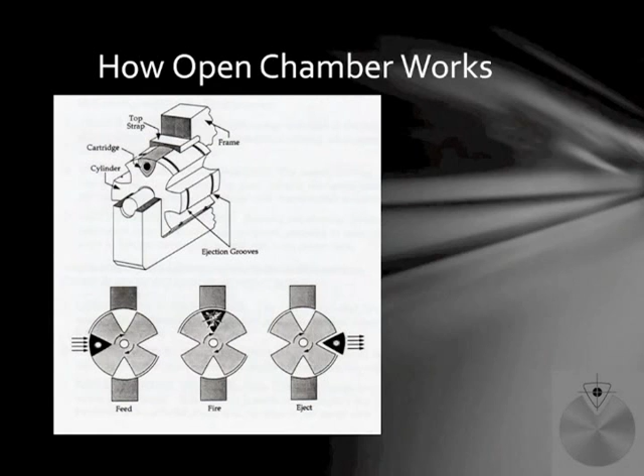What is the open chamber gun concept? Simply put, it is a non-circular cavity cut into the side of the cylinder of a gun. This arrangement allows ammunition to be fed, fired, and ejected with no need for insertion into a firing chamber. The firing chamber is formed by the top strap of the gun frame when the cylinder rotates into firing position. This design does away with the need for bolt action or any mechanism that provides insertion and extraction into the firing chamber. It's a simple concept, one that has numerous advantages over conventional gun designs.

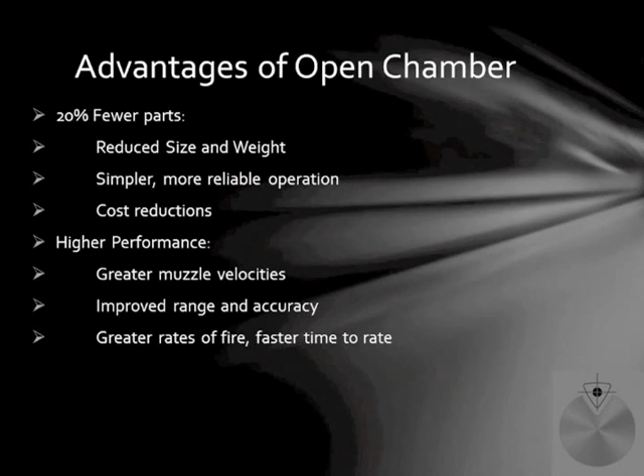Among the proven advantages of open chamber are reductions in size and weight, improved reliability, cost reductions, and higher performance. All of these are important, but there is one advantage that is truly breakthrough. It is the impressive flexibility that the design allows. This flexibility gives us the opportunity to provide solutions where conventional guns cannot.

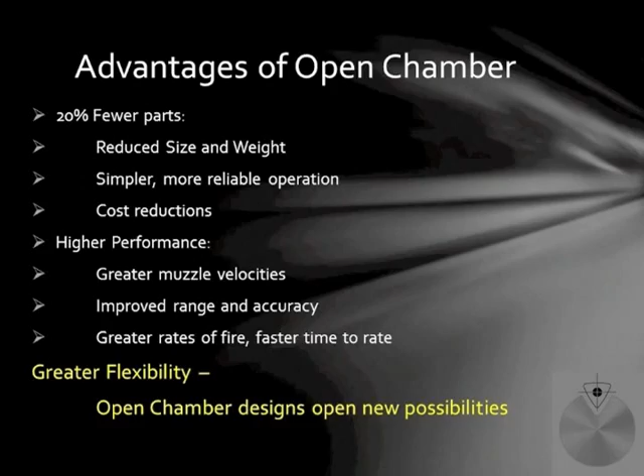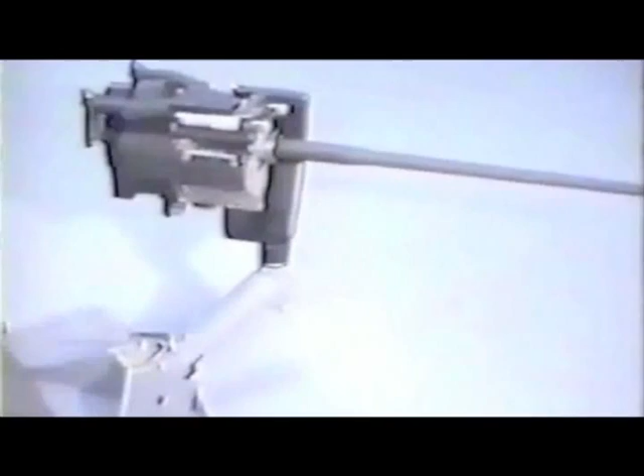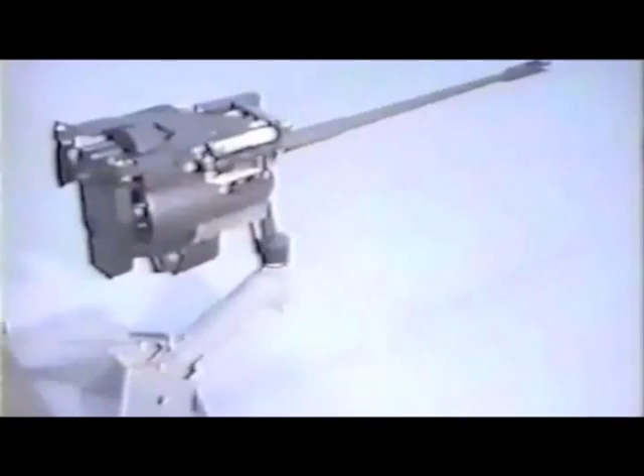The last company to develop open chamber technology was Tround International. The company was undercapitalized from inception and did not survive the defense industry cuts that marked the end of the Cold War. It did, however, successfully build prototypes that proved the significant advantages of the open chamber concept. Among other innovations, Tround built this .50 caliber machine gun that will serve as a basis for our initial platform.

We have formed Open Chamber Systems, LLC because of an important emerging market, one with technical challenges not well served by current options, one where the advantages of open chamber allow us to create a solution that does not yet exist. This market is the less lethal weapons market.

Increasing sensitivity to the unnecessary loss of life in peacekeeping, security, and law enforcement operations is a worldwide trend. This is true even as the challenges of civil unrest, regional armed conflict, the threat of piracy, and the need to protect valuable assets in dangerous locales persist and grow.

The United States Department of Defense has made it a priority to develop less lethal weapons options to help our forces effectively operate with reductions in the loss of life. They are not satisfied with the options they currently have in their arsenals.

Security agents, law enforcement officers, and soldiers currently have two options when they must suppress aggressors. Either use lethal force against these threats or accept increased risk to themselves or their objectives in order to save lives. There is no current weapon system that delivers the power and accuracy of conventional firearms with reductions in the chances of serious injury or death offered by less lethal weapons.

The reason for this is the inverse relationship between a weapon's effectiveness, in other words, the chances bad actors will be stopped, versus the risk of significant injury or death. This is the major challenge any less lethal weapon system must surmount.

New technologies, such as energy weapons that do away with projectiles, are under development. These show potential but also face major hurdles. They are logistically unwieldy, expensive, and may be too easily defended against. Nevertheless, research and development continues. Experts believe, however, that it will be more than a decade before energy weapons are deployed at scale.

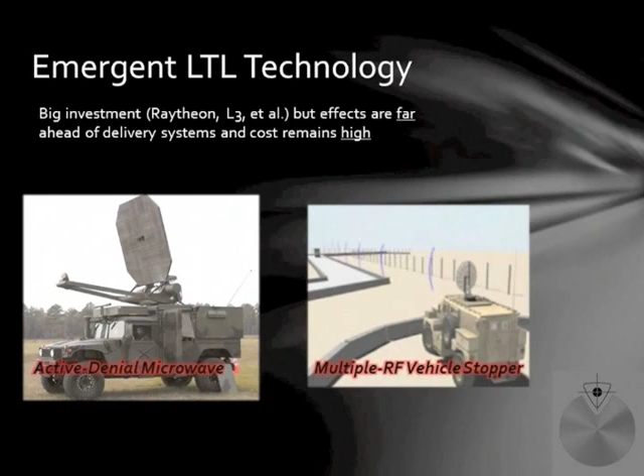The less lethal weapons market is substantial and growing rapidly. The Homeland Security Research Corporation estimates this market to reach $2.4 billion in 2012 and continue to grow at 17% per year.

There is a big window of opportunity for lower-cost, projectile-based solutions, especially for ones that solve the inherent less lethal challenge. Two properties of the open chamber design allow us to do that. The construction and geometry of open chamber ammunition is why we can offer capabilities that others cannot.

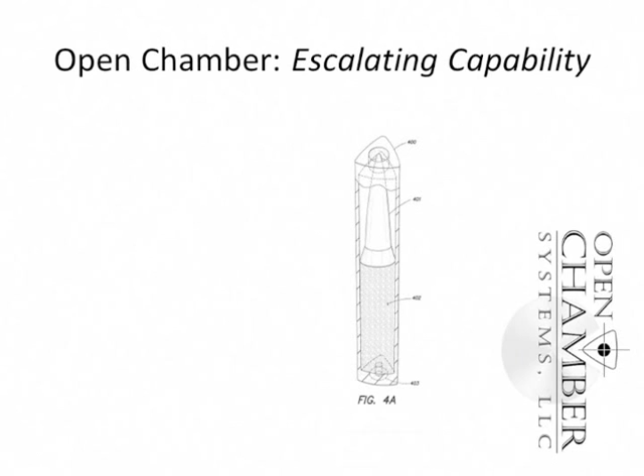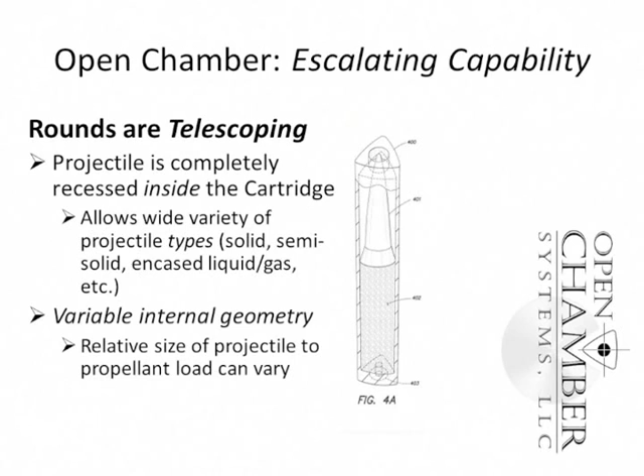The cartridges are called Trounds, for triangular rounds. Trounds are made of plastic and are telescoping, meaning that projectiles are completely encased and isolated from the external environment. The design also allows for a variable internal geometry, meaning that the relative sizes of projectiles and propellant loads can differ and yet still be fired from the same gun.

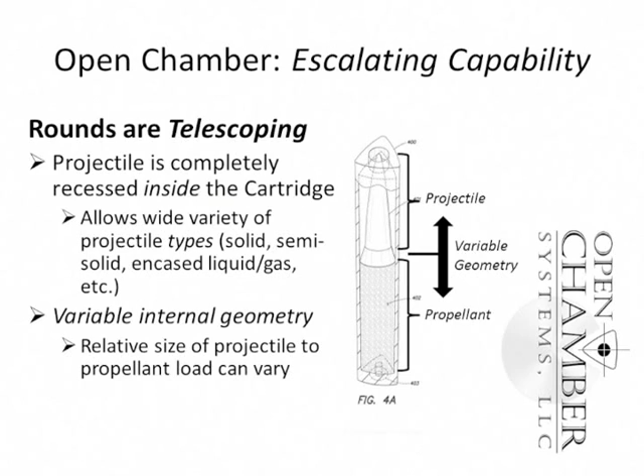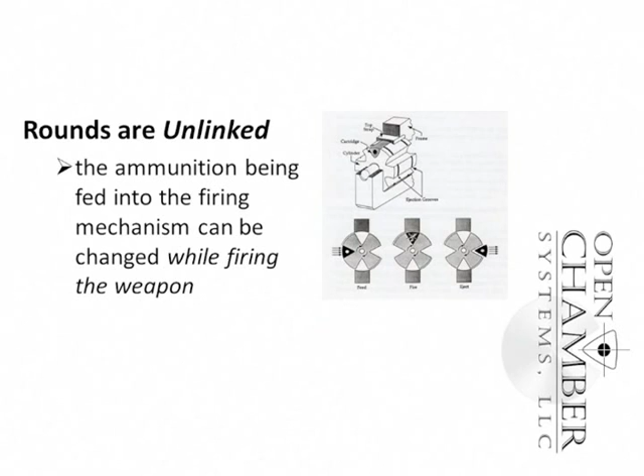The non-circular shape of Trounds allows them to be fed into the gun without the links that typically connect rounds and feed systems for conventional fully automatic weapons. This, along with the geometry of the open chamber mechanism itself, allows us to build a weapon that gives the operator the ability to select different types of rounds while firing the gun. Combined with the variety of possible projectile options, we can thereby deliver breakthrough capabilities for less lethal applications.

We have conceived a new weapon platform to fill the void between current less-than-lethal options and conventional guns. We call it the YellowJacket, and will offer users the flexible scalability they need to effectively control a space, disperse a violent mob, and defeat armed aggressors, even if those aggressors have guns.

The YellowJacket will be capable of firing fully automatic at rates that may exceed 2,000 rounds per minute. It will also have the ability to select a variety of ammunition types and propellant loads. These features will allow the YellowJacket to maintain an optimal balance between stopping power and accuracy versus the chances of significantly injuring or killing people, and do so in dynamic tactical conditions.

The capabilities of the YellowJacket system will be useful to local, state, and federal law enforcement, private security, anti-piracy, all branches of the military, and their counterparts worldwide. The flexibility of the YellowJacket platform will allow us to optimize the configurations and ammunition options according to the particular needs of these applications.

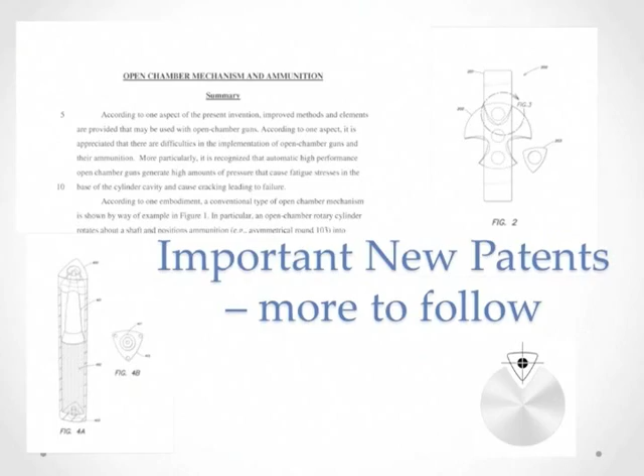The original patents for open chamber have expired. We have filed several new improvement patents that cover crucial elements for both the gun and the ammunition. Among the provisions is the use of open chamber in non-lethal weapons applications. These, and knowledge of open chamber unique to our team, give our company effective control of the technology.

The team currently consists of me, my brother Scott, my father Steve, and minority partner Dr. Andrew Hill, who is a professor at the U.S. Army War College. Our plan is to add high-performing engineers and technicians to our core team, partner with firms who are established in the marketplace, and successfully bring open chamber products to the market.

The majority of the company's revenue will be generated through the sales of ammunition. Our technical team will constantly innovate, especially regarding the ammunition. We plan to ramp up capacity and produce the ammunition ourselves, possibly using 3D printing because of the plastic case Trounds. For the production of the gun system itself, our plan is to license established manufacturers.

Our sales projections assume that we will secure our first evaluation contract sometime in late 2016. For the initial two production years, we project primarily evaluation contracts. From there, we project modest but steadily growing system orders. By year ten, we anticipate sales of at least 1,000 platforms per year.

These projections do not assume any large-scale adoption orders by a military force. Innovations in ammunition will mean a geometric increase in those sales as both new customers and the established base purchase new and improved projectile options.

Based upon projected sales of just over 3,000 systems over the next decade, we estimate a net present value of $195 million for the company. We estimate that the total cost of development for the YellowJacket will not exceed $9.5 million prior to the company reaching profitability.